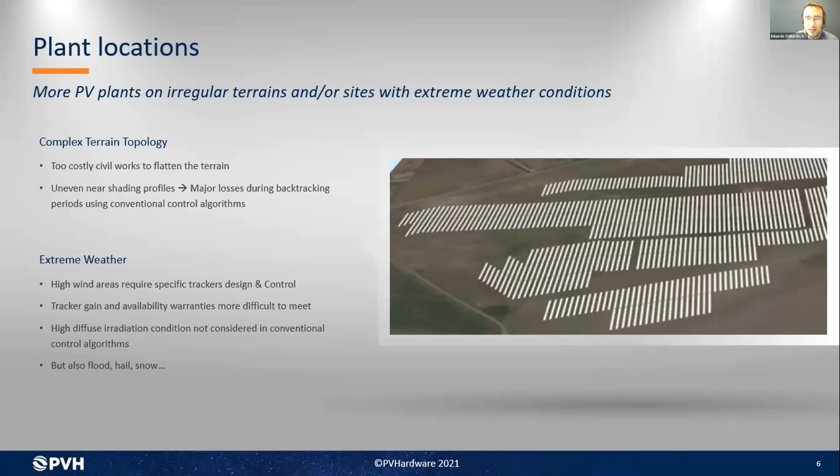Regarding terrain adaptability, we implemented this tool called Adaptative Backtracking 3D. It considers not only the X and Y coordinates of each tracker but also the elevation. So considering the height of the tracker in front and in the rear, it does backtracking to avoid shadows and improve production. This is something that we are applying to the tracking of our trackers.

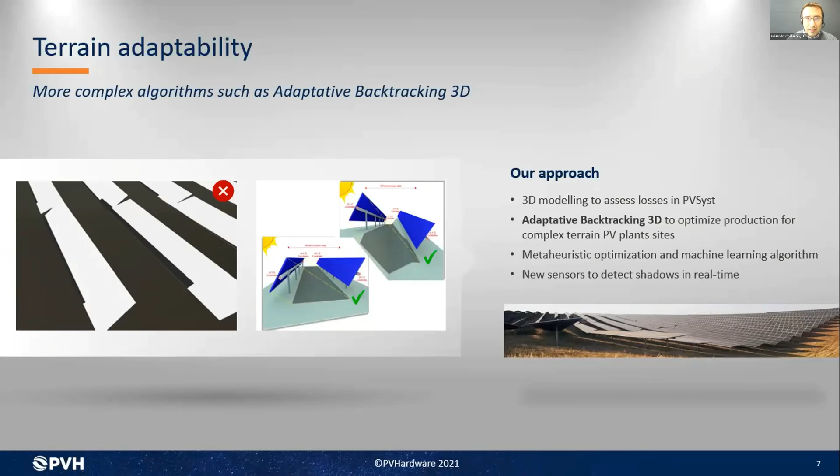And regarding production, what we see is that, of course, bifacial modules are being implemented in most PV plants around the world now. So we have a study on the bifacial gain that we have with the 1P trackers and with the 2P trackers. We have both in our portfolio.

So what we wanted to do here is an independent study to see the differences and detect whether one of them is better or not. What we have done is study the shadowing on the backside of the module, the effect of the mismatch due to non-uniform backside irradiation, and finally check the bifacial gain in 1P and in 2P, considering also the aspect ratio.

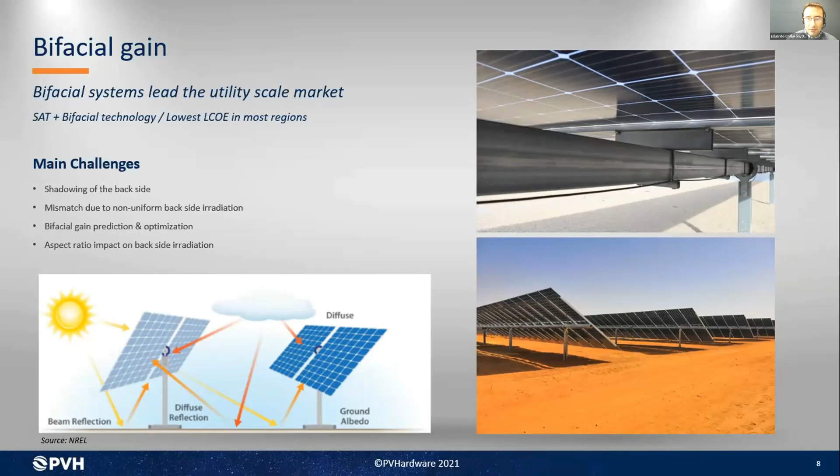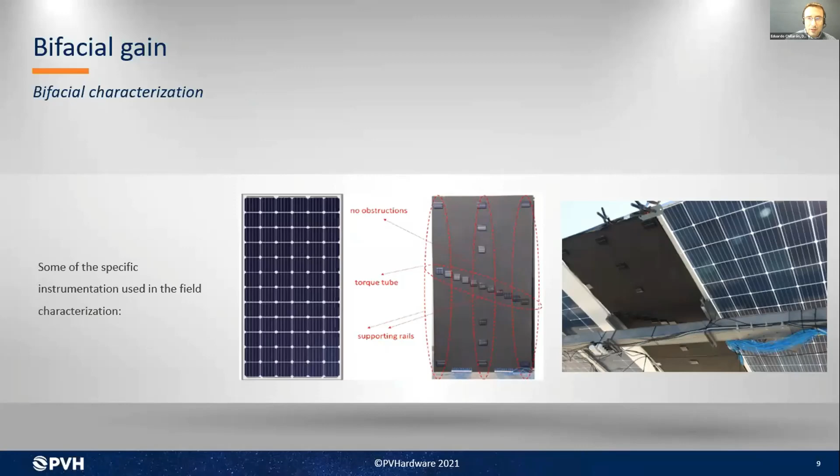What we have done in our trackers, in the Axone Duo and in the Monoline 2P, is this test with several cells in one of the modules to check what irradiance you can read in each position, and then obtain a comparison.

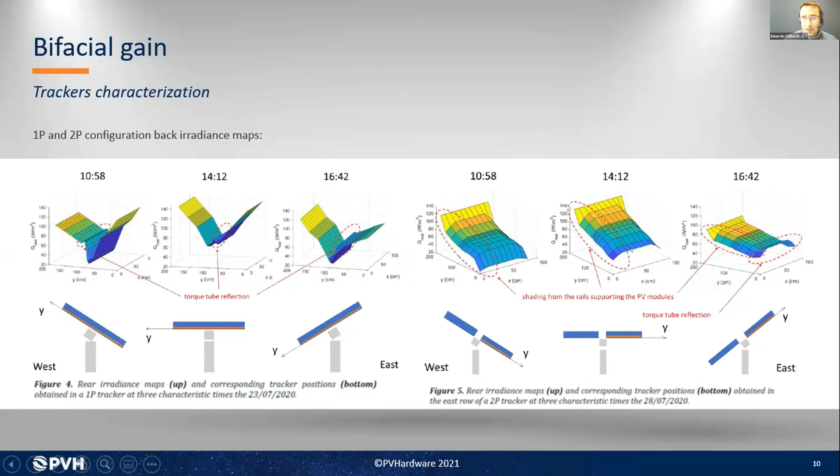And on the right side, we can see the same, but for the 2P tracker. In this case, we also see an effect of the longer panel rail that is necessary to install for these modules, and also the effect of the torque tube. In any case, finally, these are the results, the conclusions that we have.

But considering that the difference in temperature that we have seen between 1P and 2P is really low, it's not an important difference of temperature between the two trackers. We see that due to the aspect ratio of both trackers, 1P and 2P, finally the behavior or the bifacial gain of a 1P tracker compared to a 2P tracker is really similar. That's the main conclusion of this study.

So what we see is that a 2P tracker is a really good tracker for complicated terrains. In terms of production, it's similar for both. So for complicated terrains where good terrain adaptability is necessary or where the foundations are a problem, a good solution is the 2P trackers. So these are some points to consider in the new analysis that I'm going to show you later.

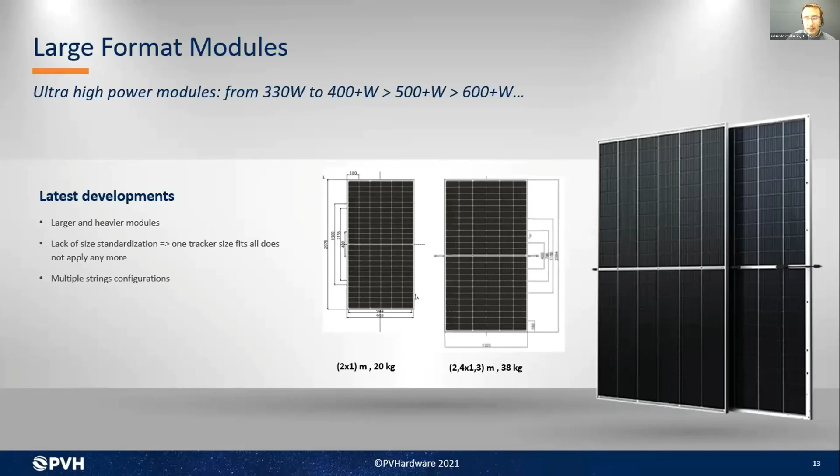Now I'm going to give a brief explanation about this new modules trend, which Pedro also commented on before, and its impact on both configurations, 1P and 2P. As we have seen before, the new trend is to double the mass of the module, from 20 kilos in the past to now sometimes close to 40. The height is up to 2.4, 2.5 meters, and the width up to 1.3. It's a big change.

These are what we identify as the main tracker challenges this year. First of all, it is necessary to redesign the trackers to adapt them to these new modules. Due to this big change in size, a complete redesign is necessary, from the wind tunnel test to the calculations, checking the whole tracker design again. From our point of view, it's really important to maintain and improve the terrain adaptability of the trackers, even with this increase in length. It is also necessary to study the increased production of these new trackers.

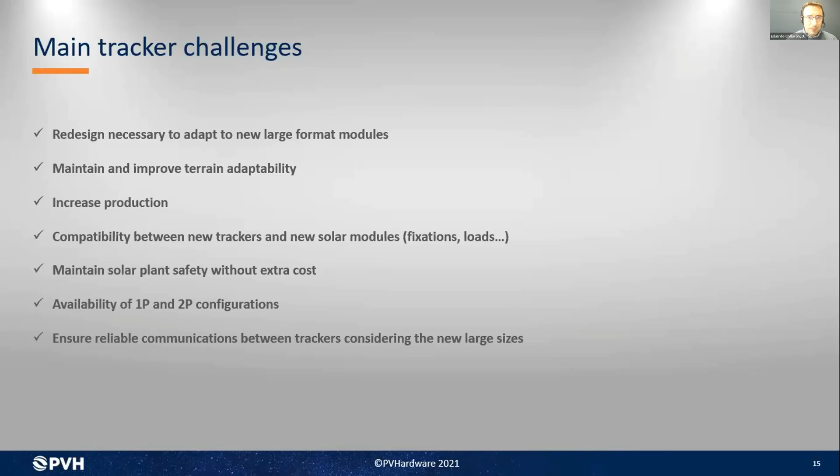Okay, so that's the introduction. Now let's go to see what from PVH we think is the solution for this new trend of modules. That we have done: we have launched to the market the new family of trackers called Monoline Plus, in both configurations, 1P and 2P. These trackers are specific for these new ultra high power modules.

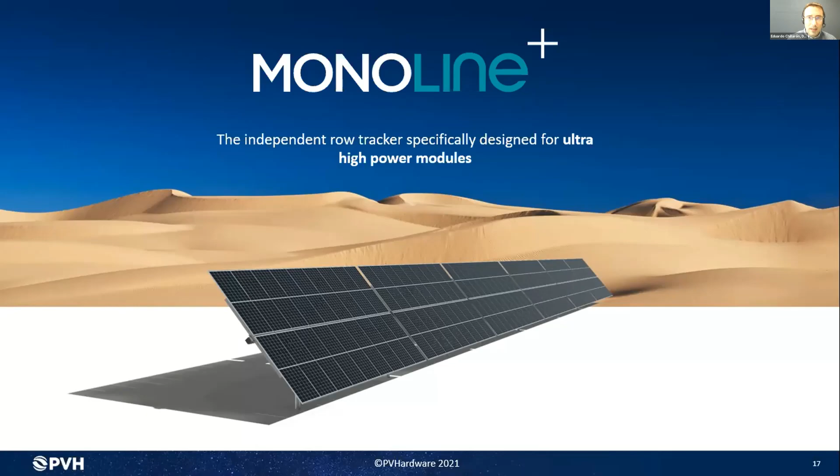Well, as an introduction, it's necessary, as I said before, a mechanical engineering. Why? I will comment only some points that I've listed here. The mass of the modules is higher. This reduces natural frequency, so we can have critical wind speeds lower, some problems of stability before than with previous trackers. Also, for the same reason, the tracker is longer, so we reduce the torsional stiffness, and the critical wind speed can be reduced. So we have high effects on aeroelastic critical wind speeds.

We will have, of course, higher wind force and moments, but not only because we have a higher area, also because due to this increase in the size, we have higher adimensional coefficients. So we need to withstand higher loads than before in the module and also in the lock points in the slew drives.

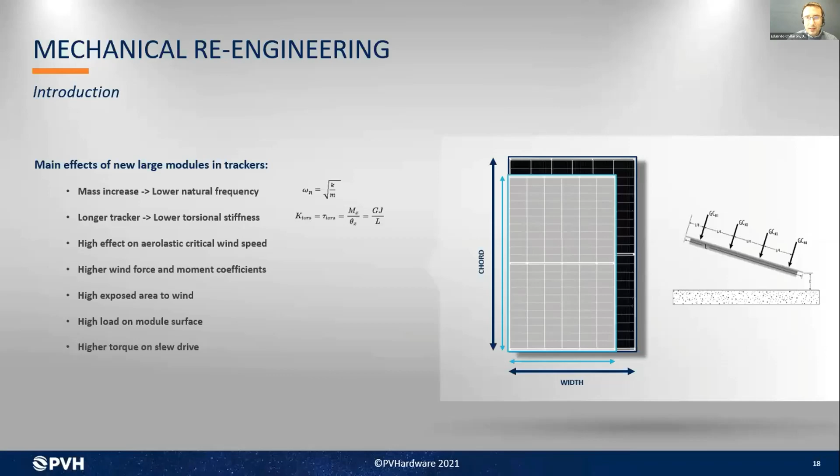Well, so from PVH, we work with CPP. I think the laboratory is like the state of the art in the market, doing this aeroelastic wind tunnel test to verify that these new designs are still safe from a point of view of the aeroelastic phenomena. So we check also 1P and 2P new configurations to check that this is not a problem for these new trackers. But not only aeroelastic, we have done again the static wind tunnel test to obtain these new adimensional coefficients and considering also the new dynamic amplification factors.

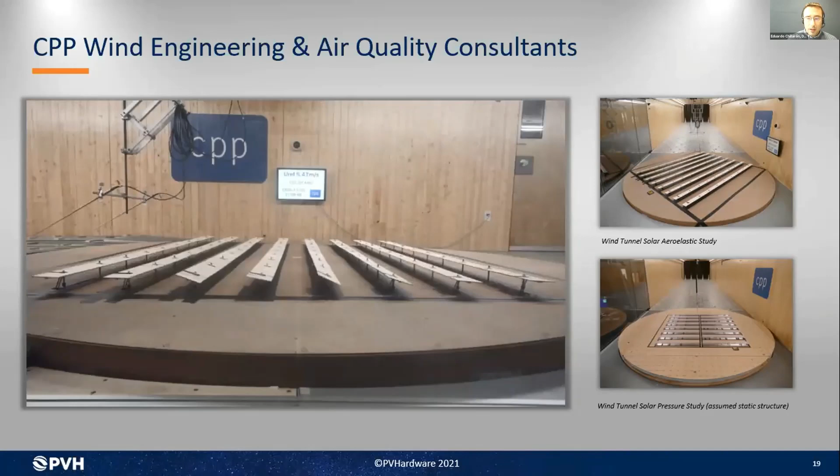Well, so we have done that, and we see that there is a different impact in 1P than in 2P trackers. In 1P, of course, we can reach a chord of 2.4 meters. Before it was around 2. But here the key is the length. We changed from trackers that previously were around 60 meters to trackers of 90 or 100 meters. The torsional stiffness and frequency is reduced, so we have to check the behavior against aeroelastic instabilities. Also collaborate with the solar module suppliers to validate fixations.

But the other way in the 2P that we see is that we have a huge exposed area to the wind. It's the doubling chord. Some chords of the trackers can reach 5 meters and length, well, depending on the configuration, until 70.

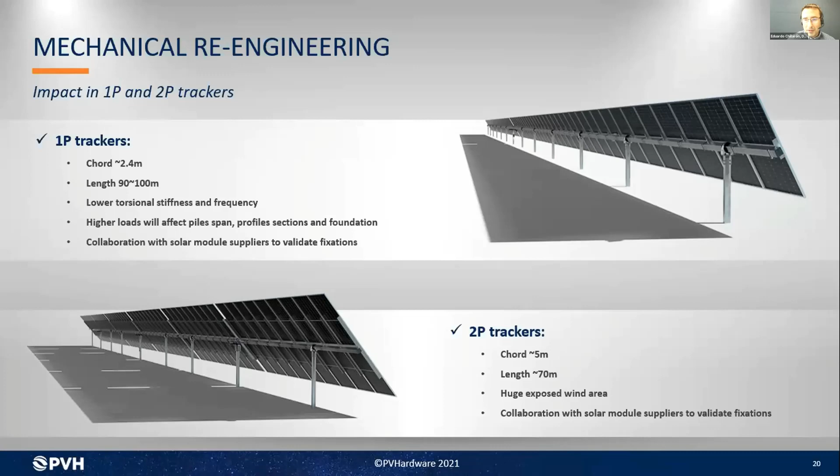Okay, so what have we done? Well, this is the first version of this Monoline Plus, the 1P solution. For the 1P, we have launched our first 1P tracker with single motor per row. Each row is moving independently from others. It can reach until around 100 meters. What we have done here is to improve the terrain adaptability, increasing the allowable slope in north-south direction. It can reach more than 20% with a new post head, and increase also the post installation tolerance, trying to avoid earthworks due to soil undulation. So we have increased this standard tolerance to make the installation of this tracker easy.

To mitigate aeroelastic effects here, we have moved to a higher stow angle than before, to maintain the stability and to maintain a higher operating wind speed. And of course, we have worked with main module suppliers in obtaining compatibility letters for this tracker. This is the 1P.

Regarding the 2P, here, well, the problem is double, more or less. We can reach a tracker until more than 70 meters. But the problem here is that we have a huge exposed area, a chord around 5 meters. So what we try to do is to move to a shallow stow angle close to 0 degrees, to reduce the efforts in the main steel components, to launch a product that is optimized in terms of steel and that is safe enough.

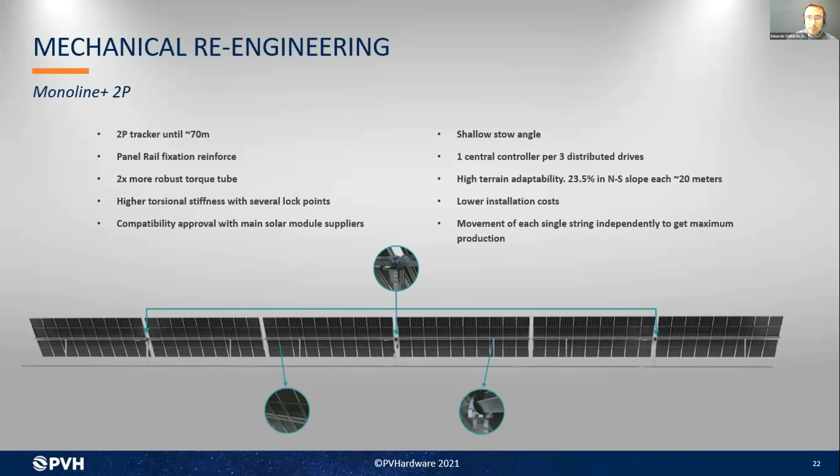Okay, we have increased the high torsional stiffness with these several lock points to be able to stow close to 0 degrees. But what happened here? Well, we have a tracker that is almost more than 70 meters. And as we have said before, we trust in the 2P for complicated terrains to adapt very well to these locations. So what we have done to obtain that is to split this tracker mechanically. Okay, so this is what we can do with this tracker.

Okay, it's mechanically split in 3 with one main controller in the center. So it's one tracker from the control point of view, but it's split in 3 small tracker units. So with this, what we can do is obtain a higher terrain adaptability, around 23.5% in north-south slope, but each 20 meters. So it's really adaptable to a terrain.

Also, we have reduced the installation cost because we only have to align 3 posts. So it's really easy to install. And also because the torque tube is only one member, we reduce the joints between torque tubes. So finally, it reduces the installation a lot.

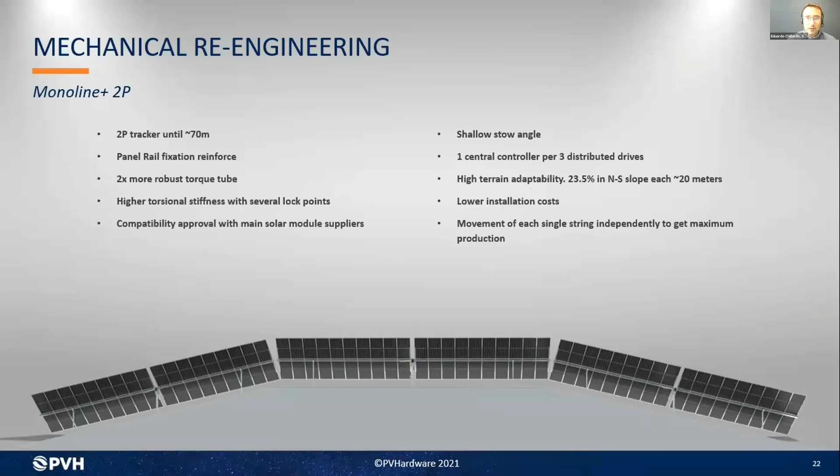Also, regarding the production, each string, each one of these small tracker units can move independently, can move at a different angle. So with our 3D backtracking algorithm, we can make each one move without generating shadows. Okay, so each single string is moving to optimize the production, to increase the production. Okay. This is what I explained before. We have only one central controller to move the 3 slew drives.

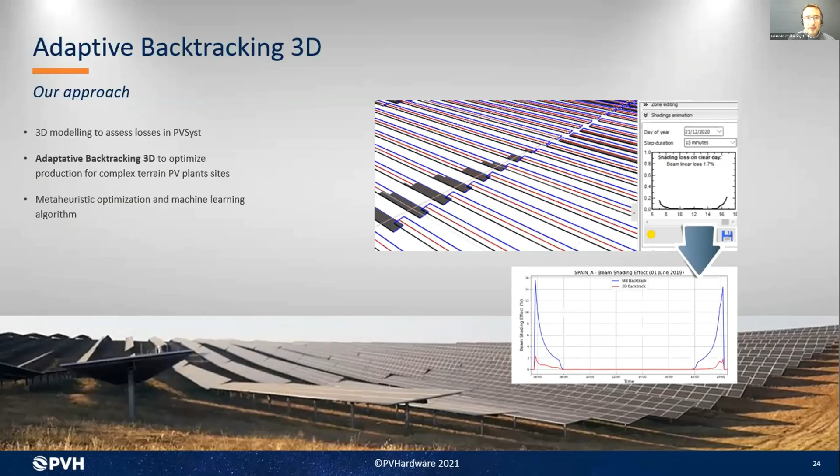And regarding the 3D backtracking and the movement of each single string, what we have done is the task of comparing what could be a long tracker of 70, 90, 100 meters. These types of trackers can be modular, but they must be installed in a line or with only one torque tube. What we have seen with our simulations is that for complicated terrains, because this tracker must be moved with only one movement, it can generate shadows, so it needs to do hard backtracking.

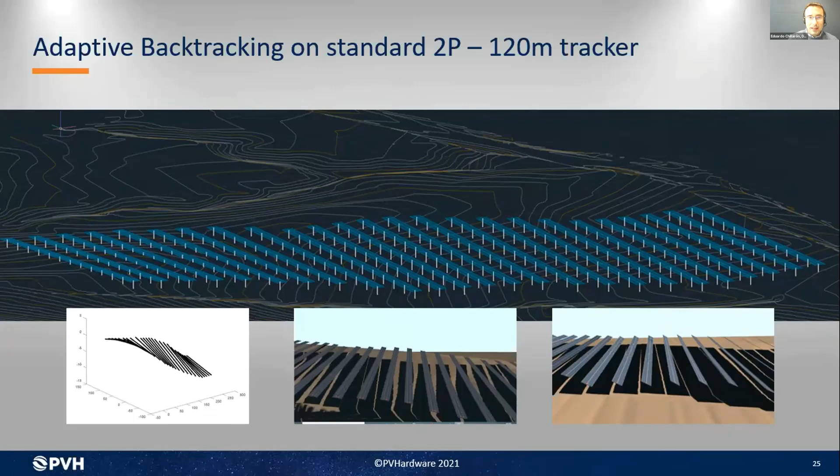Compared with our solution, which is adaptable to the terrain every 20 meters, we can generate up to 1% more production, okay, due to this adaptation to the terrain and due to this specific movement of each single string to optimize the production.

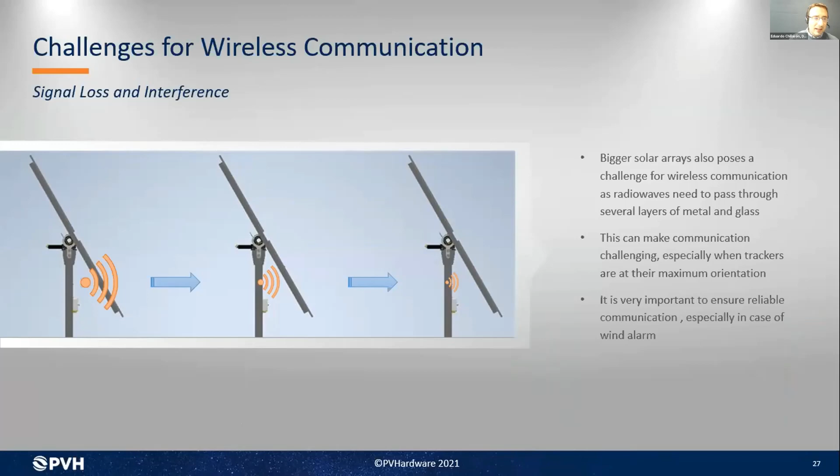Finally, I would like to talk also about communications. We have bigger modules, bigger trackers, so maybe we can find interferences that can cause problems in the communication between the different trackers or the different control units. So what we have done is work with LoRa. It's a long-range protocol that is really useful for this, and it can avoid any problem with communications.

Well, finally, just to show the conclusions of my presentation. First of all, and it's very important, with these new modules, it's necessary to redesign the tracker. The changes in the module are affecting the trackers a lot, so it's necessary to redo wind tunnel tests, static checks, dynamic checks. Of course, we continue our collaboration with CPP. It's really important. It's a really expert wind tunnel laboratory to check all the points.

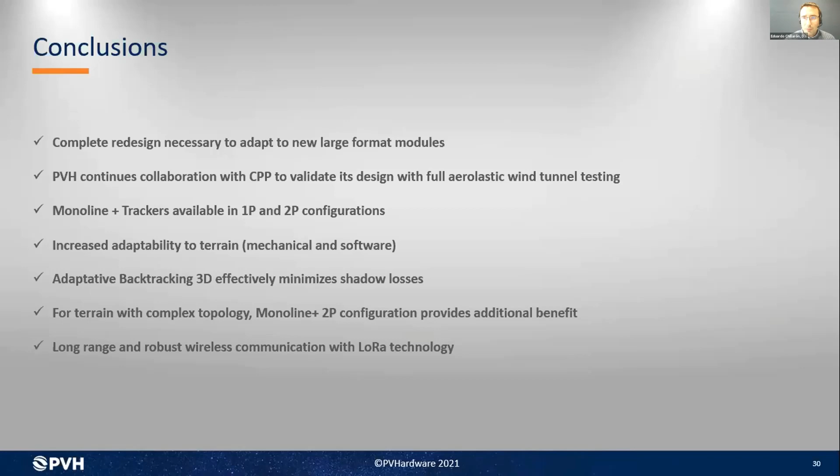We have launched this family of trackers called Monoline Plus in 2 configurations, 1P and 2P. And we have increased the terrain adaptability a lot, more so with the 2P configuration. It's maybe the best tracker in terrain adaptability in the market. We work with this adaptive 3D backtracking that minimizes the shadow losses. For terrain with complex topology, the Monoline Plus 2P provides additional benefit. And finally, the long-range and robust wireless communication with LoRa technology that we use avoids any problem with the communications. Okay, so that's all, Michael.